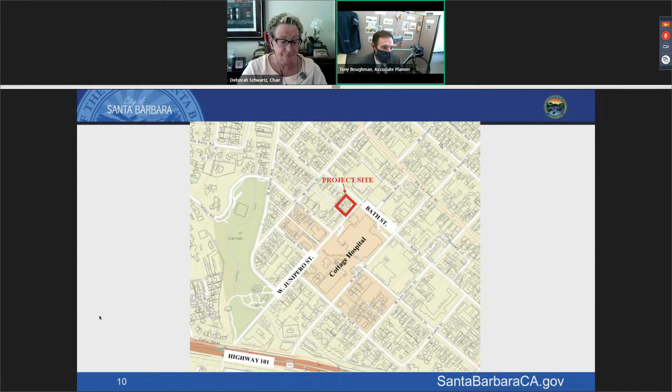Next slide. The proposed project is a 2-story, 27,317 square foot medical office building. It's gone to the city council and received a designation as a community benefit project. A medical facility like this is one of the categories of project type that can be a community benefit project. The project includes 2 levels of underground parking that takes up most of the site, almost lot line to lot line, with some exceptions for the excavation and the underground parking garage.

It includes the demolition of all existing development, all the existing buildings currently used as medical offices. Most of the landscaping would be demolished and replaced with the project's new landscaping. There are 3 very large coast live oak trees on the property that would be preserved. Next slide, please.

This is the site plan, oriented with north to the top per our city convention. On the right side we have Bath Street, and along the bottom of the slide is West Junipero Street. To the left of the project on the west side is a public alley that goes all the way through the block.

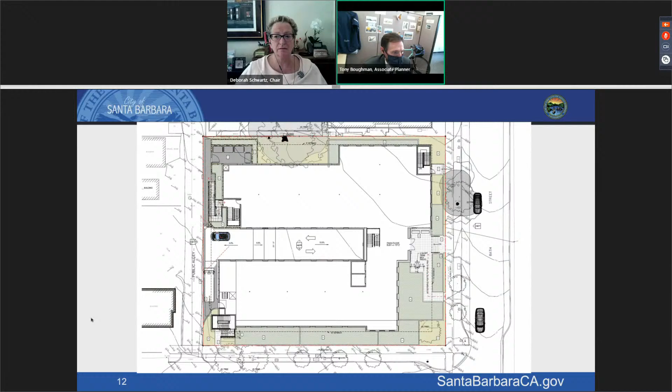Next slide, please. I just skipped to the roof plan. The architect, Mr. Cannell, has the full plan set with all the drawings in his presentation, but this gives you a look at what the building itself would look like from above. The tan colored areas, you would call a mansard roof with sloping mission tile around the perimeter. The flat roof areas, those white spots, would be the mechanical roof equipment. The roof is proposed to have green, planted roof areas. The green area on the north side of the building, that piece sticking out to the north, is a 1-story component of the building with a flat roof.

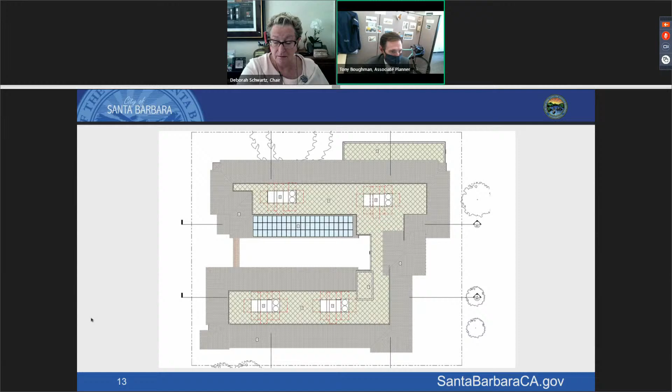Next slide, please. Now we'll walk around the elevations. This is the east elevation along Bath Street. The building has a large window area showing the main entrance. There are a few steps going down off the sidewalk into the first floor at the main entrance. You can see the site has a slight slope, with the northeast corner on the right side of the image—the first story floor level would be a little below existing grade. To the left of this elevation we're looking down West Junipero Street, and across it you can see a little edge of the Cottage Hospital Energy Building.

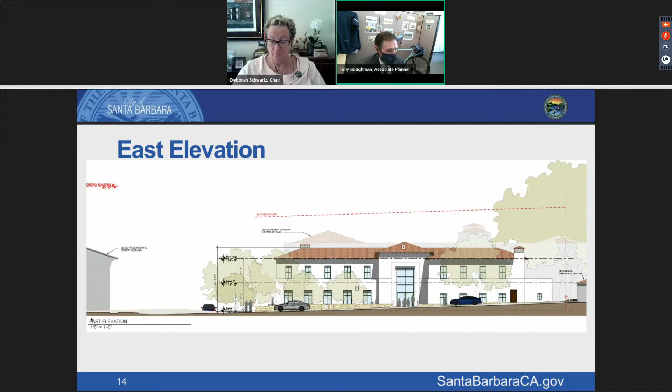All these elevation drawings have a red line showing the 45-foot height limit for the zoning. This is there to demonstrate that the project is well below the height limit. Next slide, please. We'll go clockwise around the building—this is the south elevation, the West Junipero Street elevation.

Again, the grade slopes down a little bit. The sandstone walls indicate where the raised planters are proposed. Those sandstone walls are out at the property line at the back of the sidewalk.

To the left of the building is the existing public alley. Across the alley going down West Junipero Street is mostly all medical office buildings. That shows the adjacent structure.

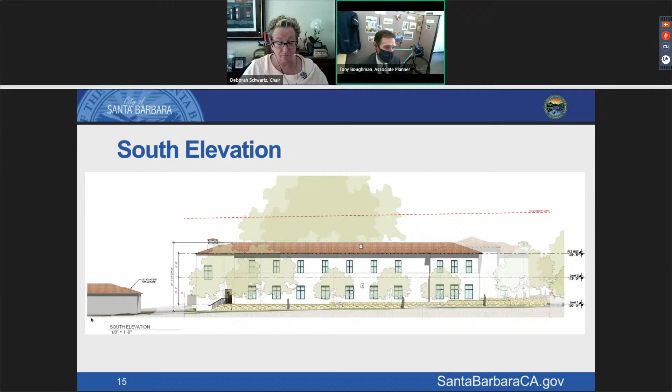In the plan set that you have, I zoomed in a little bit on these elevations so we could see them better on these slides, but there's more context shown for the adjacent buildings in these elevation drawings. They provide kind of a streetscape view in the plan set.

Continuing on around, this is the west elevation that faces the public alley. To the right of the building on the image, we see West Junipero Street. In the center of this building, we see the two building facades with the windows, which are the two end prongs of that U shape. In the center is where the cars would enter from the alley and go down the ramp into the parking garage. To the left side of the building, we see rendered that really big tree.

That's actually two trees close together there. Those are two of the coast live oaks proposed to be kept. Over on that same left side, you can see a sandstone wall with a wooden gate. That's the trash enclosure, and then a ramp, an accessible ramp, to enter that door of the building.

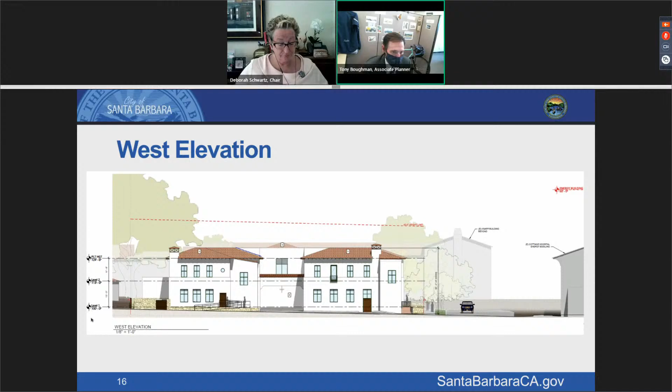Next slide. Finally, the north elevation is a view that probably wouldn't be seen that much because it's facing north toward all the existing medical offices that go north on Bath Street, on that side of Bath Street.

Again, you can see how part of the first floor of the building is below existing grade, and the brown fence there indicates the trash enclosure. In the background, you can see Cottage Hospital, which is about 60 feet tall. To the left of this image would be looking down Bath Street.

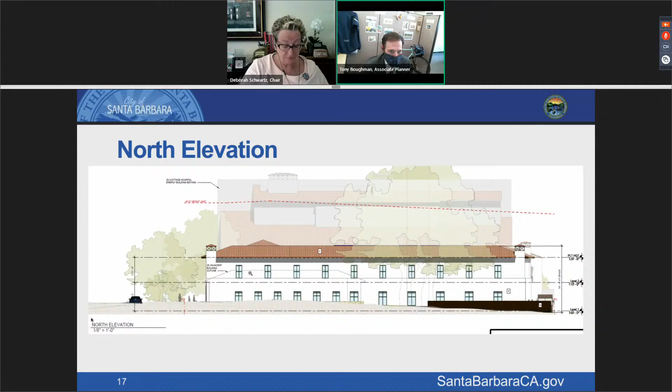So that gave you some orientation, I think, on the project. The required applications under consideration today are a development plan, a front setback modification, and an interior setback modification.

I'll go through these one by one. The project is requesting development plan approval. In terms of development plan, this project has an advantage of starting out with 4 existing lots, so it's allowed minor additions. It's allowed the floor area from the minor addition category of the growth management program of 1,000 square feet per lot, and also 2,000 square feet per lot for small additions.

In this chart, you can see that 310 West Junipero Street is showing the number 240. That means it's already used 760 square feet of minor addition in the past. That was conversion of a residential building to a medical office. Also, demolition of all the buildings on those 4 lots is 6,958 square feet. So the project already has 18,198 square feet to work with.

They're proposing the building to have 27,317 net square feet of floor area. So that difference of 9,119 square feet has been allocated by the City Council from the community benefit category of the growth management program.

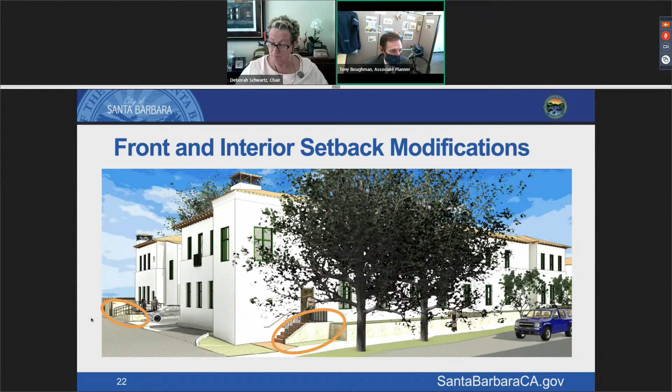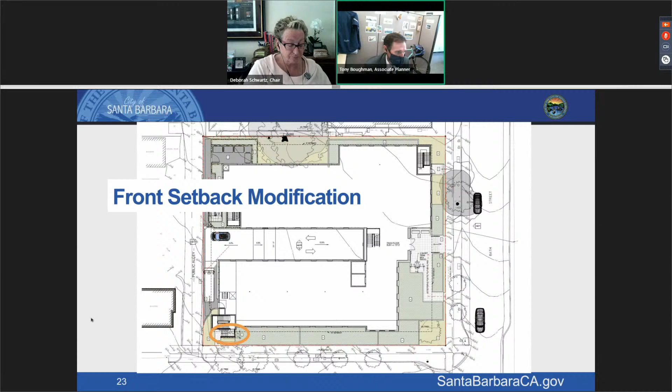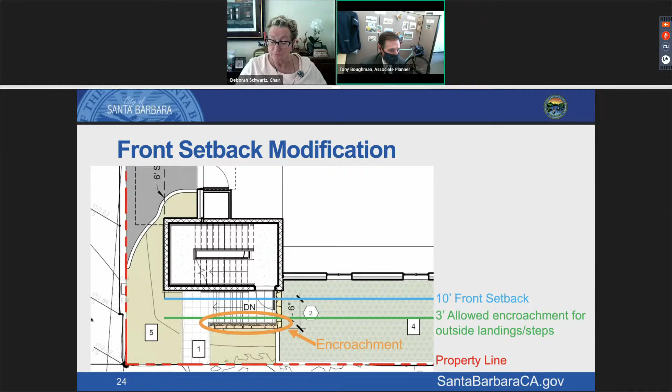Now we'll go to the interior setback modification. The findings are slightly different for these. For the front setback modification, the findings are that it's consistent with the general purposes of the title, meaning the zoning ordinance, or the specific purposes of the zoning district. In this case, it helps facilitate a medical office building being proposed in the medical office zone, so it's consistent with that.

The modification is necessary to accomplish any one of the following: secure an appropriate improvement on the lot, and staff does feel like this is an appropriate improvement, or prevent an unreasonable hardship due to the physical characteristics of the site or development or other circumstances, etc. In this case, we felt that this situation was applicable to the project.

You could see it on the site plan because they are on the opposite of West Junipero Street. The project is kind of set back from the north side to preserve the existing oak trees. Being a corner site, it has 2 front setbacks with the 10-foot setback requirement on 2 sides of the property, so that's a physical characteristic or other circumstance. We believe that finding could be made to support the front setback modification.

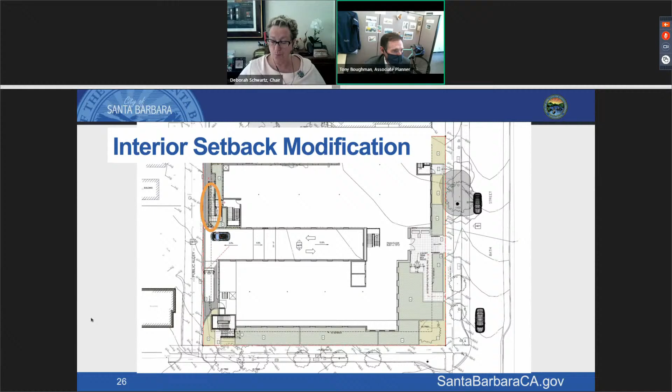Now we'll go to the interior setbacks. Here we've got that accessible ramp that's adjacent to the public alley. I did the same thing here, diagrammed what's happening with a zoomed in view. This part of the building also has a stair going upstairs. The door exits out onto an accessible ramp. It has to have the 5-foot width, and given the way the project is configured, the ramp needs to make that hairpin turn, so it's got to be 10 feet as it wraps around that turn. So the ramp is designed at the minimum size required to meet the building code.

The property line is kind of an invisible line here because it's paved. The existing situation is pavement on both sides of the property line, but that red dashed line indicates the property line at the edge of the public alley, and the blue line shows the 6-foot setback.

And the ramp, as it's designed, encroaches about 2 feet 2 inches into the setback. This one's interesting in that the zoning ordinance would allow this encroachment if it were for a landing and steps. It says outside steps or landings, but it doesn't say ramp. So we interpret it to mean the ordinance didn't allow the encroachment for a ramp, thus the requirement for the setback modification for the ramp.

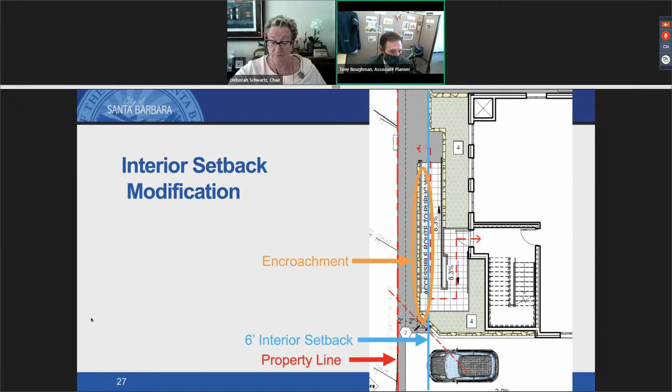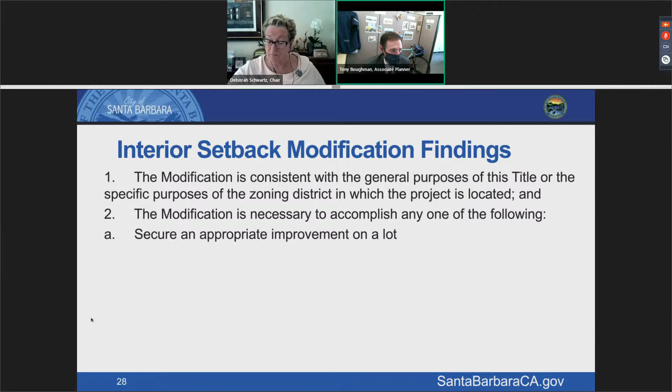The findings for the interior setback mod are pretty similar. The modification is consistent with the general purposes of the title or specific purposes of the zone. Staff cited the same findings. It's facilitating a medical office building in a medical office zone. And the modification is necessary to accomplish securing an appropriate improvement on the lot, and we believe this is an appropriate improvement.

For environmental review, the project qualifies for an exemption under California Environmental Quality Act Section 15332 because it is infill development. These are the requirements to be exempt under this section for infill development: the project is consistent with the zoning and general plan, the site is less than 5 acres and is surrounded by urban uses, and the site has no value as habitat.

This project proposes no significant adverse effects on traffic, noise, air quality, water quality, and the project is adequately served by utilities and public services. And all those things are true.

The project went to the ABR on July 27th and November 2nd. I've summarized here the comments from the November 2nd meeting when the ABR continued the project to the Planning Commission. They liked the Spanish character of the project. The 2-story project fits in with surrounding buildings, similar in height and size to the surrounding buildings, and the project is sensitive to historic resources.

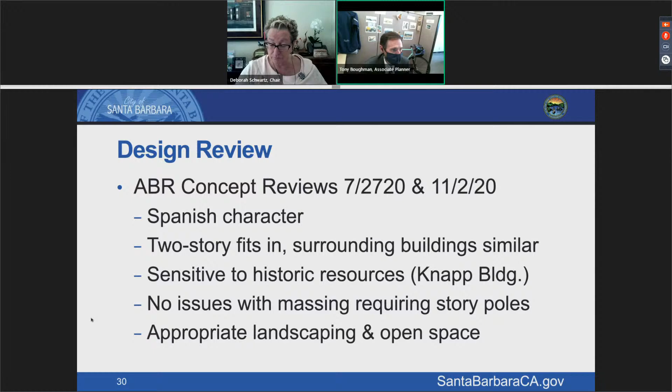The modifications came up late in the game. Unfortunately, we had completed pre-application review team and development application review team reviews of this, and then when I was preparing the staff report for the Planning Commission is when I discovered these 2 setback encroachments I just described. So the applicant returned to the ABR for the purpose of the ABR commenting on the setback encroachments.

That happened just this past Monday, so this is when I prepared this slide. These were raw draft minutes from the ABR secretary, but I was at the meeting so I heard them all too. This summarizes what the ABR had to say. They made a unanimous motion for this and to continue it indefinitely, so it'll come back to the ABR. They were all supportive of the proposed setback modifications for the stair and ramp.

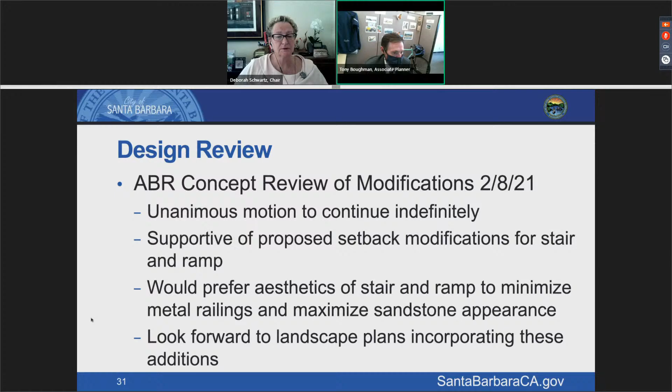And they made a design comment that they would prefer the stair and ramp to minimize the metal railings and maximize the sandstone appearance. It's purely a design thing—they just thought it would look better to see more sandstone wall and less metal railing. They said they would look forward to landscape plans incorporating the changes.

So in conclusion, staff recommends that the Planning Commission approve the project, making the findings outlined in Section 8 of the staff report and subject to the conditions of approval in Exhibit A of the staff report. This concludes my presentation.

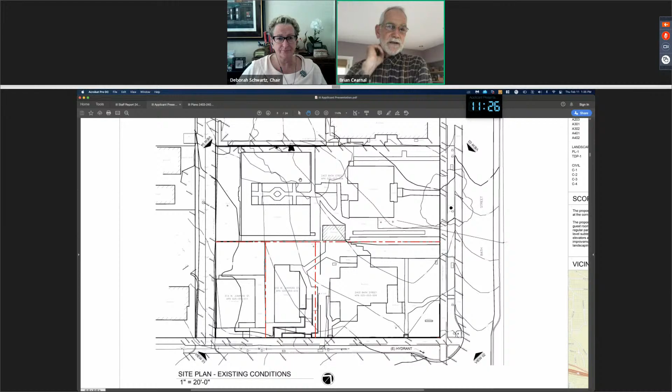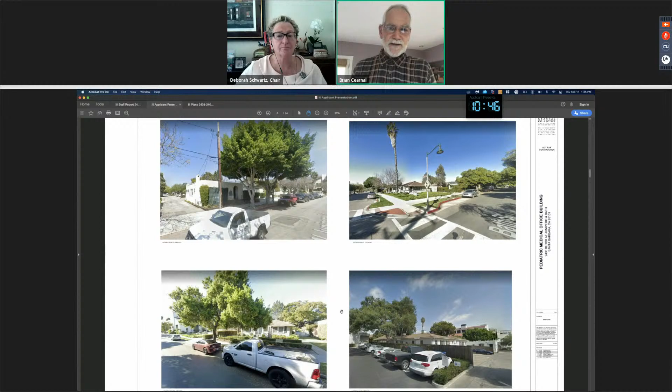So the design is really very simple. It is basically two efficiently dimensioned wings that will accommodate medical office space. This idea came up to facilitate the ramp going down into the parking. As Ron mentioned, that was a criteria we were given, and we're very lucky to have been given that criteria because it's going to be very expensive.

There's a lot of rocks in this neighborhood, and I'm sure we'll be taking out ones that are the size of small cars or maybe even small trucks. But this allows the ramp to essentially serve as a separation between those wings, which allows us to get natural light and air on all sides of the wings that will have medical office. It really does work well, and then the wings are connected to a central lobby that is a 2-story volume off of Bath.

As Tony also mentioned, because of the topography, this courtyard into that lobby is slightly below the level of the sidewalk at Bath, and then we connect back to grade with a ramp down a little further.

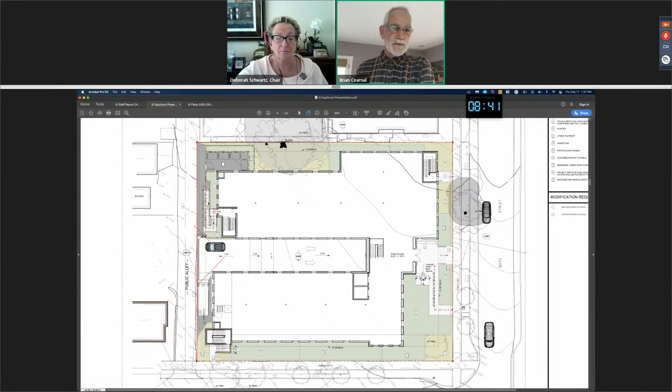So this is the parking structure. We're looking at the lowest level in the parking structure, two levels down. At the very bottom, you can see how all the stairs connect up to the building, as well as the elevators. So this is the lowest level.

The next slide gets us to the intermediate, or the first level from grade. You can see the two ramps, the ramp coming down and then the ramp going back down further. So you can really see on this plan how we worked very hard to carve away the footprint of this excavation in order to protect the critical root zone of these two oaks. There's a large, massive two-trunked oak along the north property line, and a beautiful oak along the Bath Street frontage. So we've manipulated the shape of that to accommodate it.

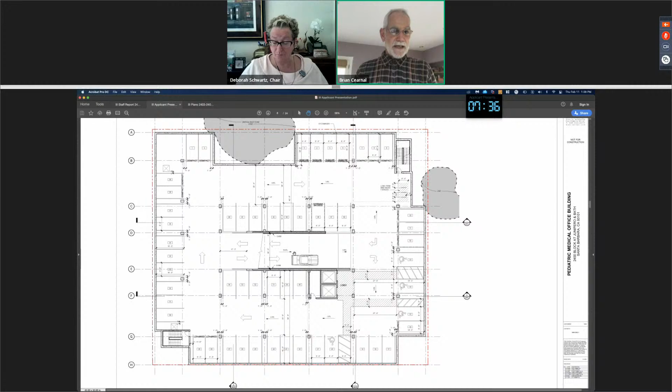So this is again just the first floor plan. We can move up to the second floor. They're really basically simple stacked two-story plans.

If we go to the roof, we can see, as Tony mentioned, we're showing green roof around the mechanical units. We don't need to put this much green roof in from a SWMP standpoint. We are going to have a couple of tanks that are going to collect rainwater, as well as the green roof up on the roof. If you're interested in that, we do have the civil drawings we can show you if you have any questions.

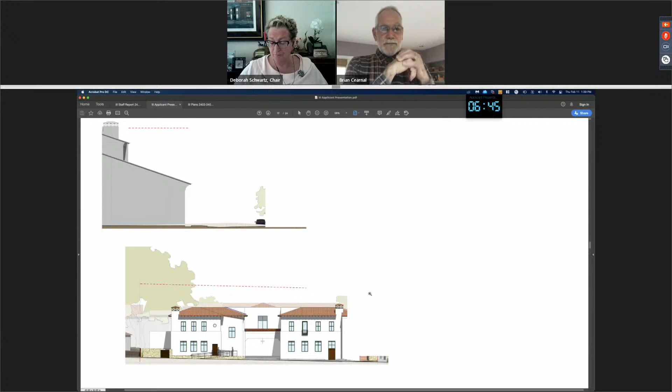So Tony went through these elevations. I think we should skip through these quickly and get to the views, which I think will be more telling. But you can see the size of the energy building there on the left compared to our proposed structure.

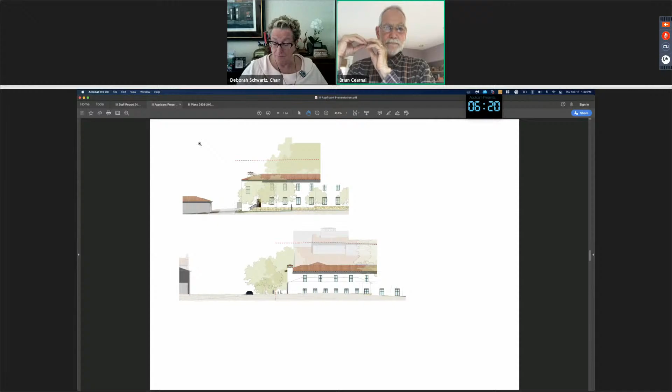This again, the lower elevation is the alley. It's a very simple building, which I think again is in keeping with the character of the Knapp building across the street. There's a lot of planting along the street trees along Junipero, which is this upper elevation. But you can see in this elevation the plinth of the building, which is that stone wall, the raised planters over the top of the parking structure below.

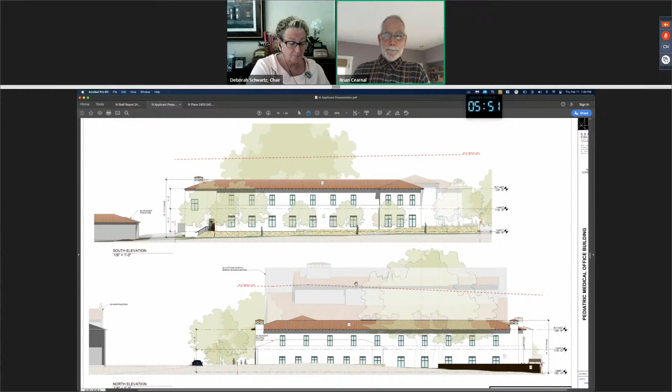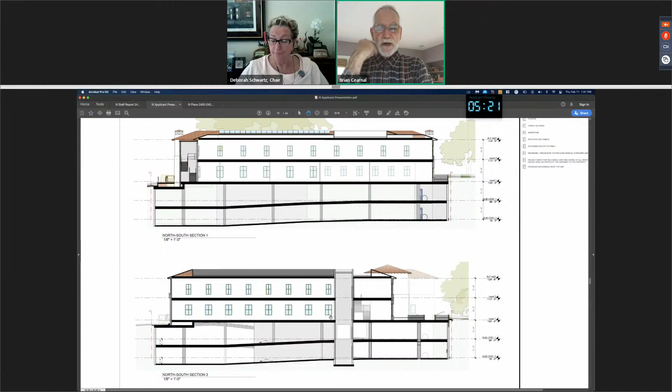Showing that gap where the ramp is and how we're able to get natural light and ventilation into the spaces on either side, the two wings.

Again, very simple building. We intend on having beautiful rafter tails. The base is kind of extended out to articulate it from the second floor above.

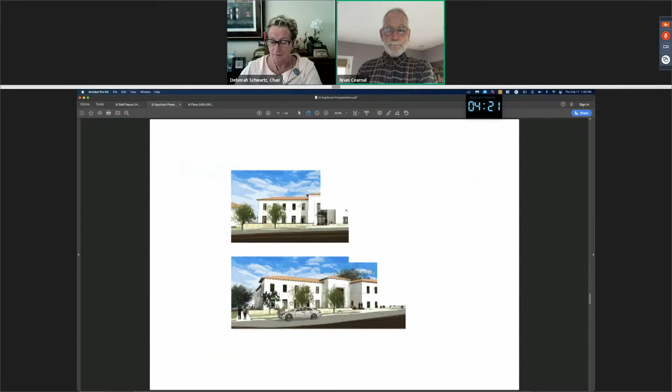The upper view is from the corner, where we show a young tree. This is an opportunity where, on the corner, we have Mother Earth, so we'll be able to plant a really beautiful tree that will grow and prosper over the years.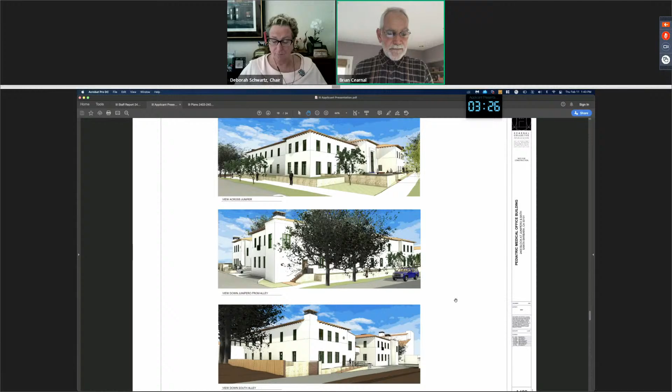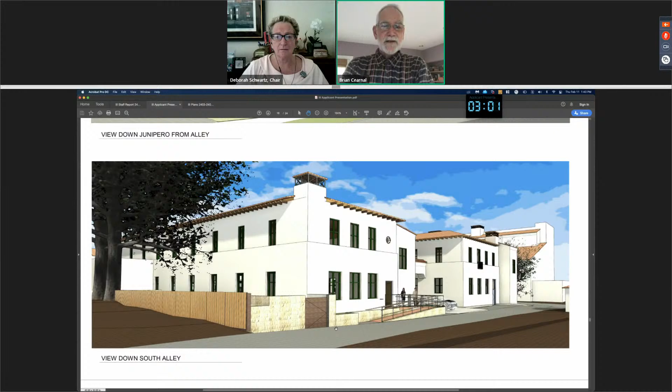One of the things, if Mr. Boughman could zoom in on that lower one real quickly. One of the things the ABR asked us to do, and I think it was a good suggestion, is the idea that we would announce that vehicular entrance. You can see that little piece of roof, kind of like a roof covering, that creates an element allowing for signage and clarity for visitors using the building. And then obviously the gates to the trash enclosure there in the foreground.

Next slide. And here is the landscape plan. Bob, if you want to jump on and give us a brief description of the concept. Thank you, Brian. Good afternoon, Madam Chair and members of the commission.

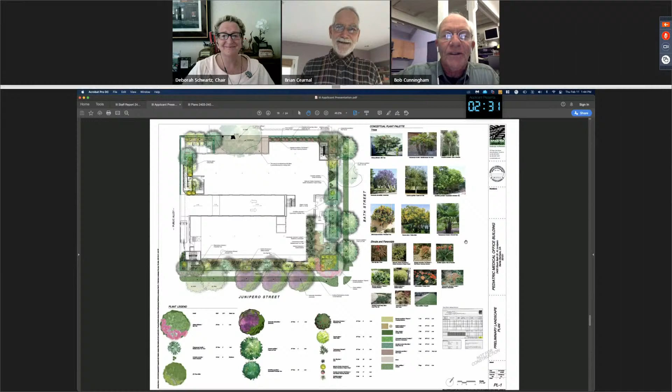Brian referred to the specimen tree on the corner of Junipero and Bath. It's a mimosa tree. We don't have many of them in town. We have a couple of magnificent specimens on Northern Modoc Road at the Lutheran Church. If you've been by there, especially in springtime when those trees are blooming, you can appreciate their size and beauty. We seldom get opportunities to plant trees that large in town because it's a city. But at this location, I think it's going to be a great spot, and it will really feature that corner. The remainder of the landscape is meant to complement the building's mass without overwhelming it.

The taller trees we have are Stenocarpus, or firewheel, in the upper right-hand corner and lower left-hand corner. We've got 5 of those altogether. The medium-sized trees along Bath Street, and in the upper left-hand corner, are Scheffleras, or Queensland umbrella trees. We have clusters of windmill palms between the windows against the building, and Mediterranean fan palms below those at grade above the planter walls.

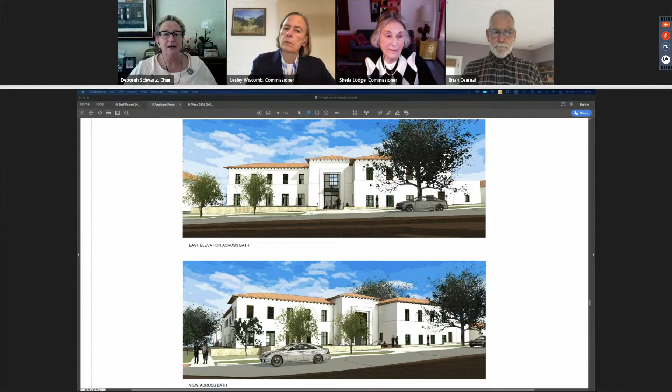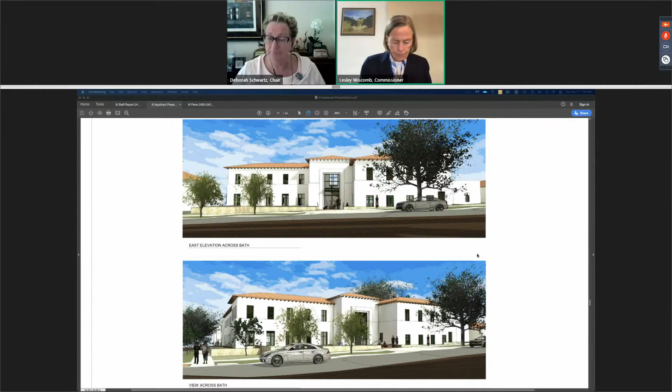I'm not sure where they go—most of them are on the conditions of approval, which I think is appropriate at this time. Is that right, Madam Chair?

Okay, good. First, I wanted to start with the Dudek letter on page 5. It says approximately 26.3% of the site will be landscaped, but the staff report says 21.9%. I assume the Dudek letter is the more up-to-date calculation, since the letter was dated just a week ago. Could someone answer that? I'm sure Mr. Boughman's report was prepared before that.

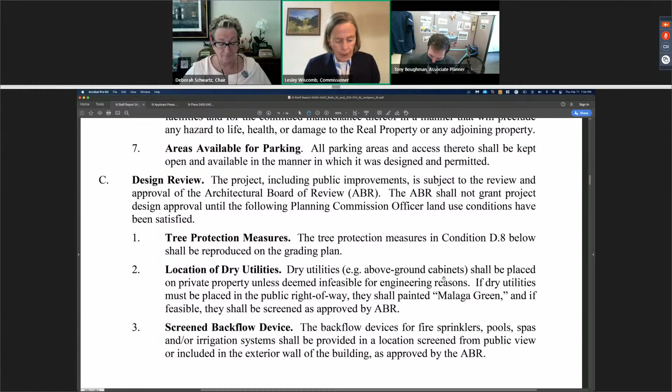Okay, and I'm bringing that up now, just when we actually get to this. And then it talks about, on page 4, that's 12 of 46, under D1C—did I get that right?

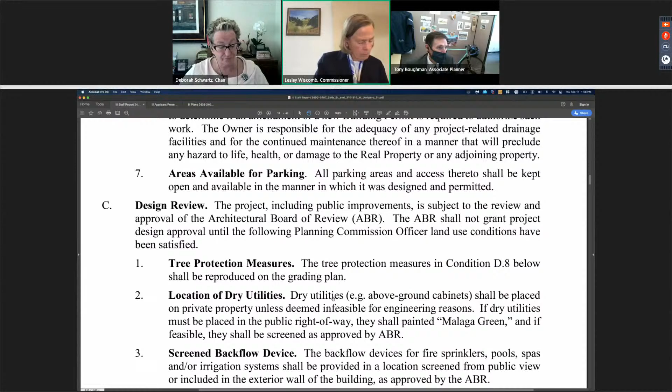So that's pretty unwieldy, I assume you're referring to section D8. I just wanted clarification because that section is so... where is it again, D8? Yes. So are there certain sections of D8 that you want on the grading plan? Because you don't want this whole thing on there, I don't think, the whole all of D8, do you? It goes on and on. I would assume you want A and B.

I'm just looking through it. Well, you can look at the tree con... if you go to the next page, Mr. Bolton, this covers A and B, and then the next...

Yes, well, storage and... maybe that, it's just a lot of information to try to put on a grading plan, which is a pretty technical document anyway, and will be for this project because of the amount of cut, but Ms. DeBuskus is here. Chair Schwartz and Commissioner Wiscomb, typically what happens is the grading plan would include a separate sheet that identifies the applicable conditions of approval. So it shouldn't be a problem then. Okay, thank you, I looked at that and thought, oh, I wouldn't want to put all that on a grading plan, so okay, that's great.

Okay, and then on the conditions of approval, page 10, D9, why am I getting these wrong here? No, I got the wrong page here. Hold on, I'm sorry, I apologize. Oh, I'm looking at page 18 of 46. Yeah, okay, I'm on page 18 of 46. It's page 10 in the conditions of approval.

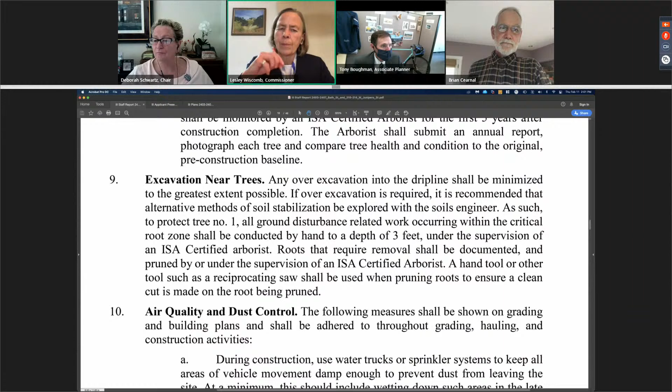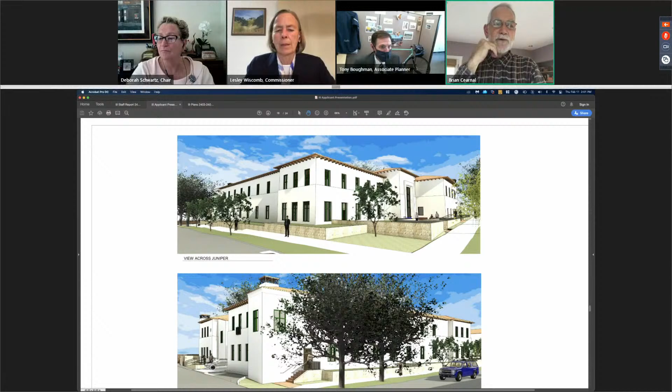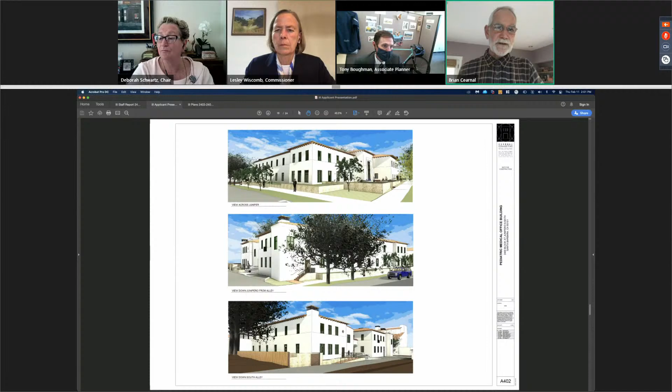One more question for you, Mr. Cearnal. I didn't catch this on your plans, but you have a 1-story part to this project, right? Yes, on the north side. What is so why is that 1 story? Is it neighborhood compatibility? Well, it kind of gets back to the way the building configured after we figured out the parking, because form follows parking. We had extra square footage, and after the rational extrusion of 2 stories, it made sense to have that 1-story portion transition to the 1-story building to the north. So that's really the reasoning.

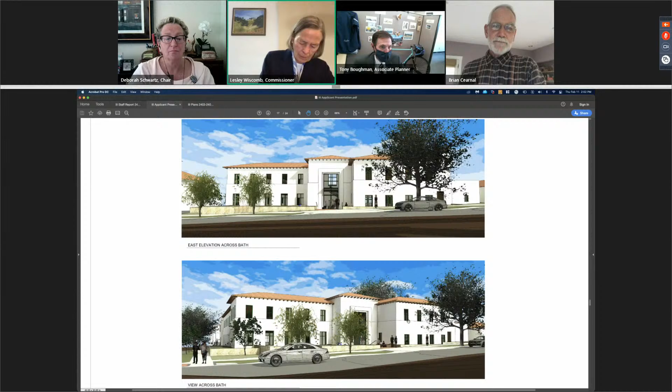Okay, thank you for that. Until Mr. Boughman mentioned it, I missed it, and I thought it must be neighborhood compatibility, but that's a nice transition, I think. Okay, great. And my last question is just on page...

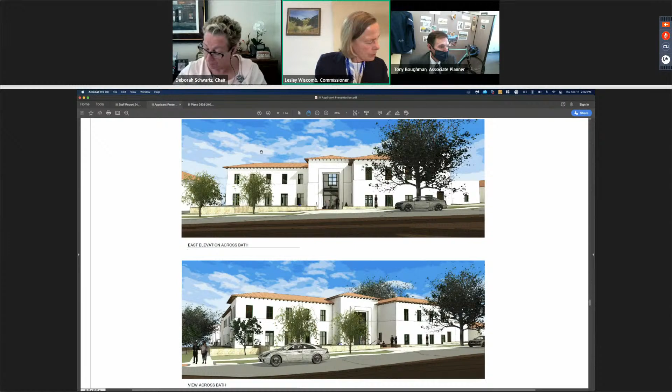Page 20 of 46, which is page 12 of the C of A. Maybe Mr. Marshall can answer this - I was curious, given the age of the existing buildings, has any asbestos investigation been done yet? There's a section 11 on asbestos.

Hi, Ms. Wiscomb, how are you? Good, thank you. Good, thank you very much for your question. Actually, can you hear me okay? Yes, good, thank you.

We have not done any investigations of these buildings yet for asbestos. It's very common to do that prior to the beginning of construction. Since they're all occupied right now, we didn't want to disrupt the occupants, clinicians, and other folks, doctors who work in these buildings until we need to. So at some point, once we relocate everyone, we can do that assessment fairly quickly with the proper noticing.

Great, okay, thank you very much for that. I figured that was probably the answer. Sometimes it's obviously, given the age of these buildings, invasive to do asbestos investigation - you have to scrape window frames and all sorts of things. So, okay, thank you for that. Madam Chair, that completes my questions.

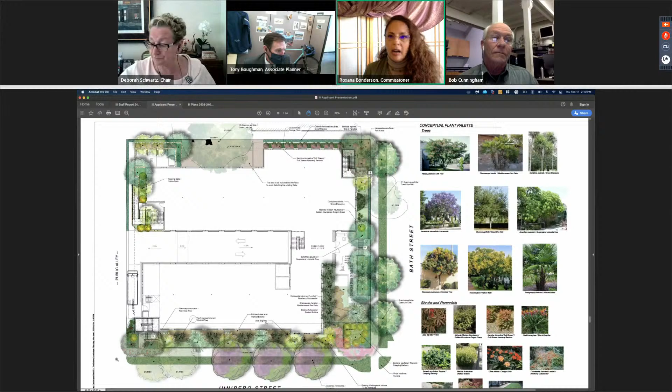Mr. Bolton, do you mind zooming in? I just have a personal curiosity. I couldn't find this in our plan set, where the stairs come out into the setback on the lower left-hand corner of the plan set. Mr. Cunningham, what do you have proposed here?

Those two trees are firewheel trees. They're slow growing, but they get to be quite large over time, they'll get to be 40 feet tall. We have a few very mature specimens on, I think, the 100 block of West Arrellaga Street. They do quite well in confined spaces, and they're an attractive evergreen tree. The other trees in that location, although they're not called out on the plan, and I've probably forgotten what they are, but I believe there are some Australian Dracaenas, Cordyline australis, that will provide some height against the building. But we're relying on the firewheel trees to do most of the heavy lifting with regard to buffering the mass of the building.

With my knowledge of that tree, it's probably going to be somewhat of a visual protector of the stairs as well. The stairs aren't going to be so very visible. It's exactly what I wanted to know. Thank you. My following question will most likely be best for Mr. Cearnal.

Hello, Mr. Cearnal. Nice to see you. Good to see you. I had just one curiosity. I did not see it in the package, and I wanted to double check that I didn't miss something. Is there any solar

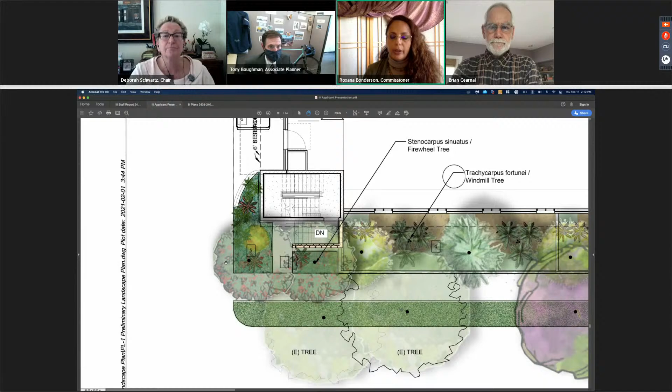Yes, solar panels, photovoltaics. Anything that's going on in this building? Mr. Bolden, if you could go to the roof plan, which right there, yeah. So we are showing discrete, quite a few panels actually, but we've sort of discreetly hidden them into the mansard that's in that vehicular passageway.

Wonderful. And would you be kind enough to share with us just a little bit further how much it is expected to collect and how it's going to serve?

Does it exclusively serve the building, and how will it do that? Yeah, it'll exclusively serve the building. We're not anticipating putting these panels on battery or anything. So it will basically go directly into the grid and help the meter run in reverse during the day and reduce energy costs, hopefully significantly. As you can see, that's actually quite a few panels.

It'll generate a good amount of electricity. I'm very pleased to hear that. And is there any outdoor space that will be accessible for the people using the building on the roof for any, I don't know...

No, we're not. Really the green roof that is on the roof right now, obviously the one on that one-story portion you see in the upper portion of the screen, that's going to be nice because the windows from the second floor will look out onto that. Unfortunately, the upper roof is really just to meet stormwater requirements, and the civil drawings show there's really not a lot of area that's required. At the end of the day, we may avoid putting the green roof up there if we can make the calculations work, just because you'd like it to be an amenity if it can be, and not just up there, not being seen. But no, we do not have roof access, other than what's necessary for the mechanical equipment.

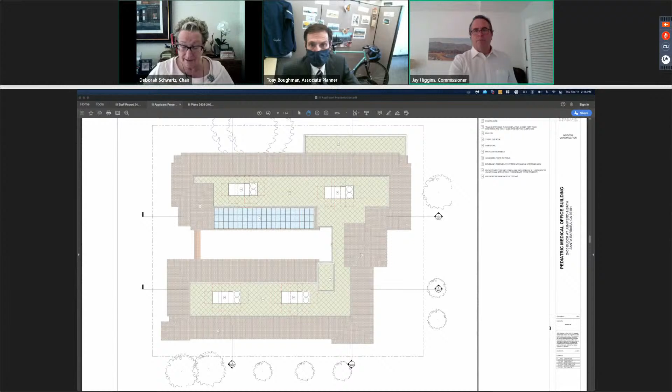I guess then I'm up. I'll go to my questions, I just have a few. First, I'd like to ask perhaps of Mr. Biscaro. So go ahead, Mr. Boughman, you can turn off your webcam if you like. Mr. Biscaro, and then let me ask Mr. Bolton to please put up, this is page 15 of 46 in our package. These are the conditions of approval. Construction parking, number 7, construction parking.

Thank you, Mr. Bolton. And in this area, Mr. Biscaro, I'd like to ask you, which I don't see here, if there's going to be some sort of a monitoring process by Cottage, similar to when you had your master redevelopment plan, either by a Cottage employee or some third party, with a hotline, a complaint hotline available for neighbors and a reporting back to the city, again mirroring what we put in place with you on the master redevelopment plan.

Yeah, Chair Schwartz, we will mandate per the conditions of approval offsite parking. That's worked extraordinarily well to mitigating neighborhood issues for the past 15 to 17 years as we built the new Cottage Hospital. We will do the same here. The level of workforce will not be near as much at any given time, but I think we'll use one of the shopping centers perhaps, and then shuttle people back and forth.

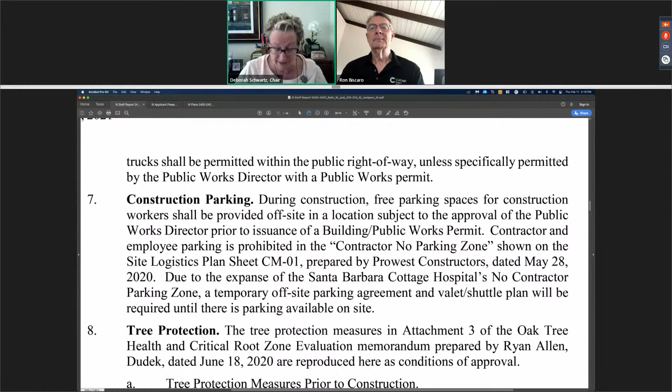Very good. And then my next question is on page 35 of 46 in our package. Is this the Dudek letter? Yes, this is the February 2nd Dudek letter. I don't know if this is either to Mr. Biscaro or Mr. Cearnal - this is kind of a light question, but it piqued my interest.

The existing enclosed garage on Pueblo - I was curious about the capacity there now, such that you are feeling a need to build a brand new, two-level underground garage under the new development. Or have you maxed out most days in the existing garage? Is that why?

I would say we actually underparked our facility master plan from the very beginning because of the incentives that we provided to employees to carpool and ride motorcycles and bikes, etc. At times, certainly the employee parking lot is always full, and it's difficult to maintain enough parking. We titrate our employees between the Knapp parking structure, behind the Knapp building, which is about 600 cars, and the other parking structure, which is for physicians and the general public. So for the most part, the Pueblo parking structure, which includes general public parking, is mostly full most of the time. It's also very inconvenient, relative to this building, to have parking basically two blocks away and then shuttle people back and forth.

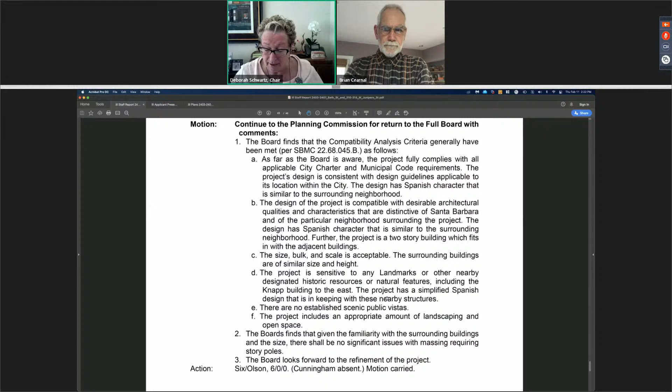Okay, very good, thank you for that. Mr. Cearnal, I have a question for you from the Architectural Board of Review meeting minutes - these are the November 2nd meeting minutes, page 43 of 46 in our package. I'm just curious, any comments you might have, Mr. Cearnal. At the very bottom of the motion, number 3, the board looks forward to the refinement of the project. I don't know if I'm missing something - are there any significant refinements that you anticipate would be forthcoming or required to move forward for approval? Or is that more of a generic kind of statement as a closing statement in the motion?

I think it is the latter, Chair Schwartz. They were very pleased with the building, and I think they were just saying that they're looking forward to being able to see the details and refinement of it. We are intending to go back immediately to the ABR for project design approval - right now we're trying to get scheduled for the 22nd, so that'll be in a week and a half. At that point we expect to get project design approval. I think they will probably identify particular details they're interested in. We've already made the change to the stairs that they requested, which we're getting the modification for today. I'm being presumptuous, but you understand what I'm saying. Yes - I think we're in good shape to move forward.

We will go back to them probably at least twice as we're developing the design, for in-progress review, just to make sure that final approval is as smooth as possible. Okay, very good. Thank you.

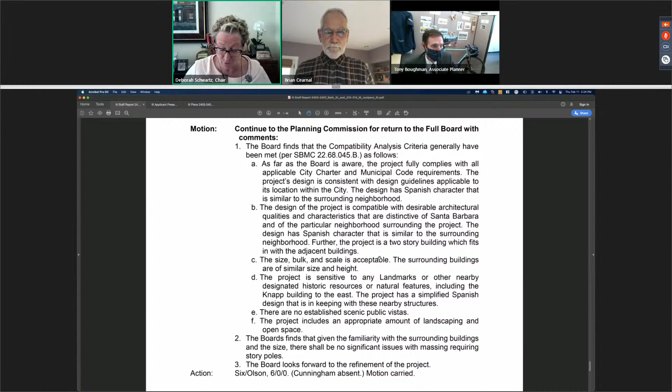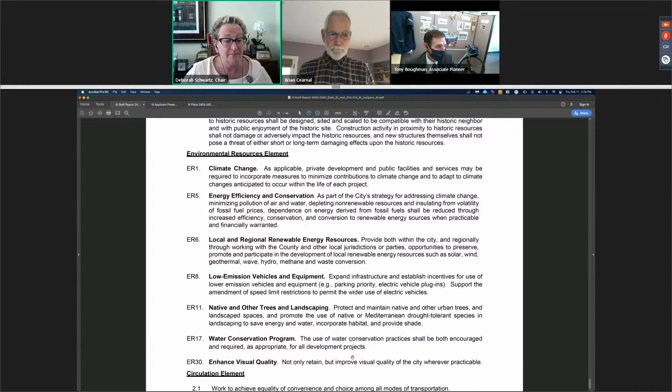And then if you would stay on, Mr. Cearnal, my last question, I think, well, to you or Mr. Boughman. This is the last page of our package, 46 of 46, and this is the applicable general plan policies before us. So this is the circulation element I'm interested in. If we go to the very bottom of this page, Mr. Boughman, Mr. Bolton, we have 5.53 and 5.7.1. I would just ask you to please review with me the sidewalk improvements that are required and that you have on the plans that comply with these two aspects of the circulation element. With this being a pediatric-oriented and family-oriented facility, I just want to confirm my understanding of what improvements we're making that will really facilitate that and comply with this element.

Well, as far as within the right of way, Chair Schwartz, we will just simply be replacing sidewalks that Public Works directs us to. I don't have a recollection of whether they have identified any specific portions that require replacement, but I anticipate usually there are, because of tree roots and that kind of thing. Otherwise, the building is completely accessible. That's actually one of the reasons for the ramp alongside the alley, to provide an accessible path of travel to the trash enclosure. We will basically follow Public Works direction on what they require relative to the improvements within the right of way, but we're not planning any changes to that right of way at this point.